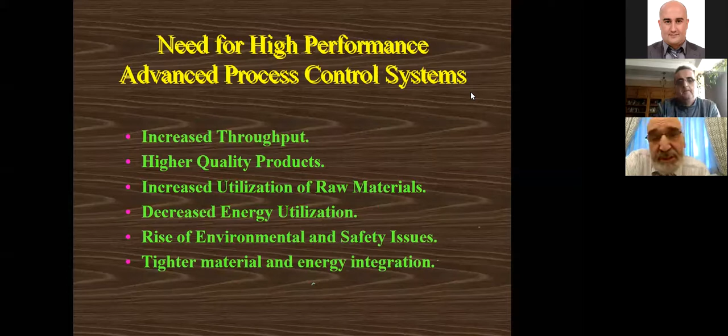Today I will talk about the field of automatic control, its status over these last few decades, and then projections into the future and application areas. I will motivate the importance of automatic control at the beginning, then talk about challenges, and mention what kind of advanced control techniques are partially solving these challenges. Then I will discuss present and future trends of automatic control with various potential applications we will be working on.

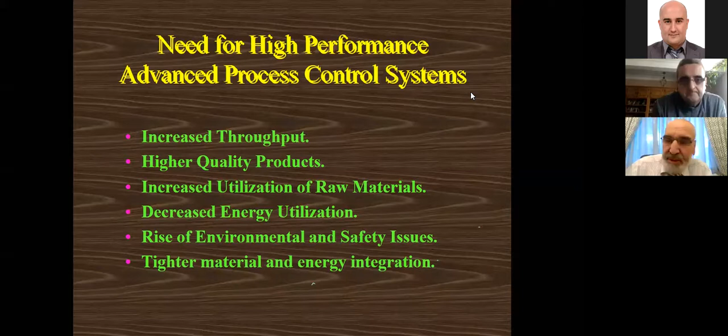Of course, control and process control in particular is very important. Introducing control in a plant or process will increase productivity, give better quality products, optimize utilization of raw material in the loop, save energy, and ensure a safer environment with better energy integration. There are many benefits of control.

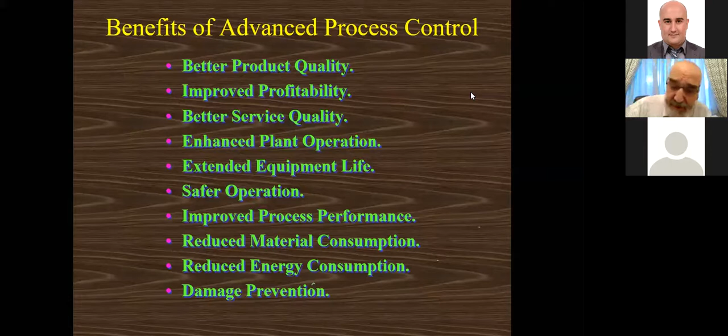Once you introduce a control loop for process variables in any plant, system, or process, with tight control and optimization you get better product quality, better profit because you gain in energy consumption, and better service quality because you maintain variables at nominal values, producing what you want with the quality needed. You enhance plant operation and extend the life of equipment because you develop smooth control so actuators operate smoothly and safely. You improve system output performance, reduce consumption, and prevent accidents.

So what happens when we have a control loop or process control system? What are the challenges? Many, very difficult challenges. We have time delays in systems, and because of the delay you will not be able to reply, control, correct, or compensate for the system before you see the process variable or output. There is some non-minimum phase behavior we don't have time to explain, but anybody is welcome to ask questions later. We have complexity in modeling.

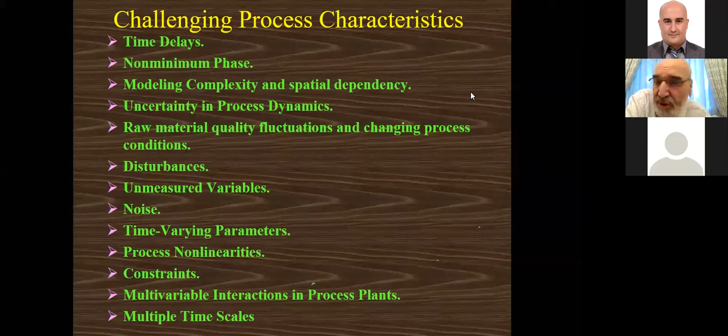We have physical systems whose dynamic behavior depends on space and time. We have uncertainty in process variables, fluctuations in raw material, and all kinds of predictable and unpredictable disturbances. We have variables you cannot measure in some applications such as space, nuclear, chemical, etc. We have hard process nonlinearities that are difficult to develop controllers for. You have constraints on variables, interaction between process loops that make life difficult to control various variables, and you could have multiple timescales, as I will show in a few minutes with some examples.

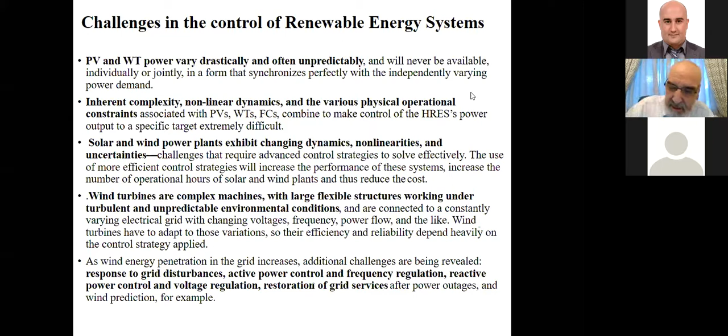An example of these challenges for solar photovoltaic and wind turbines: as you know, you don't get the sun, irradiation, or wind at the time you want, at the pace you want, with the amount you want. Especially for wind, there is a lot of randomness and unpredictability, so the control loop has to deal with that. We have inherent complexities in wind, solar, and fuel cells—nonlinear dynamics, etc. We have changing dynamics; things change with time, sometimes unpredictably, sometimes randomly, sometimes without even knowing the change. For wind systems, these are large structures with big complexity, so the controller has to cope with these complexities.

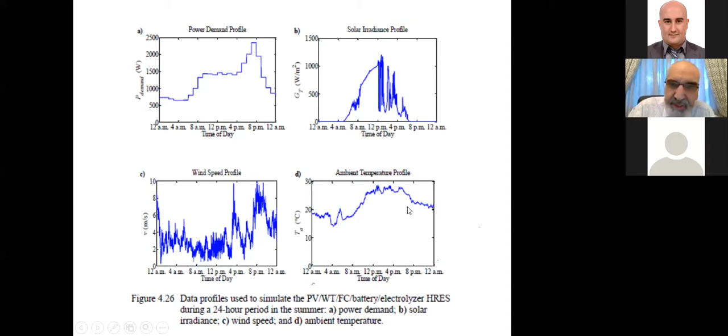Same thing for wind—look at this variability and unpredictability of the wind speed in a given day; the next day it will be something else. And again, all these energy consumptions are affected by the temperature profile, which is also partly unpredictable and very variable.

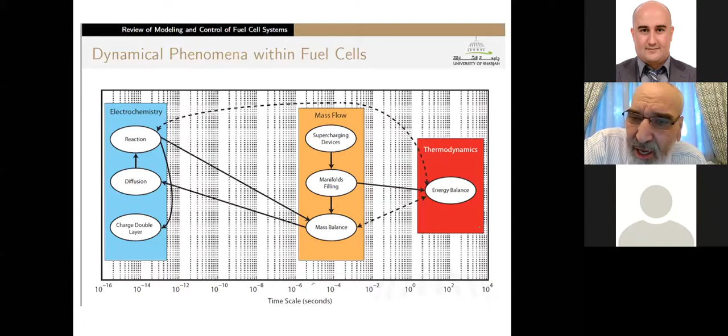Other problems include the multi-time scale behavior I mentioned. You could have systems where your controller has to cope with phenomena changing in seconds, phenomena changing in minutes and hours, or even picoseconds.

Here is an example of a fuel cell. There is electrochemical dynamic behavior, mass flow behavior, and thermodynamics behavior. Thermodynamics are slow, in minutes, sometimes in hours. The physical evolution of thermal behavior can be in seconds and minutes, while the mass flow could be in milliseconds.

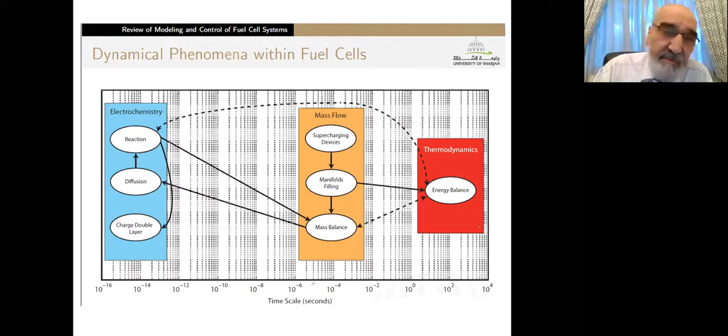Electrochemical dynamic behavior could be in picoseconds and less. So your controller has to be able to follow the behavior of all of these timescales, and it's not evident. Could you imagine controlling a variable that is changing every minute, and another variable that is changing every picosecond? It's not trivial how the controller will do it. Very, very difficult. So these are timescale problems.

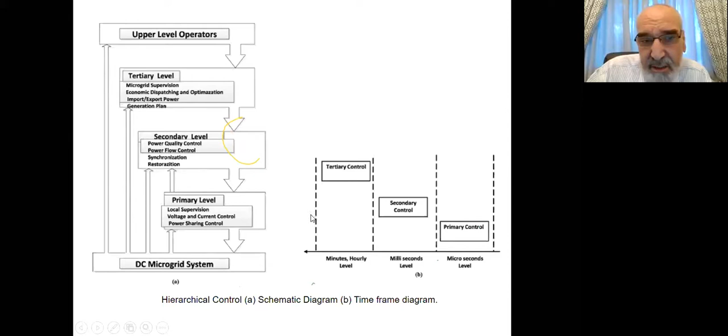Further, you could have multi-level control with some hierarchy: 3 famous hierarchies - primary control, secondary control, and tertiary control. For example, in a microgrid or in many power system applications, you have these 3 levels: the local level, the secondary level, and the management level up there. All of these have to be interconnected and coordinated together, and the controllers at every level are different, with different challenges.

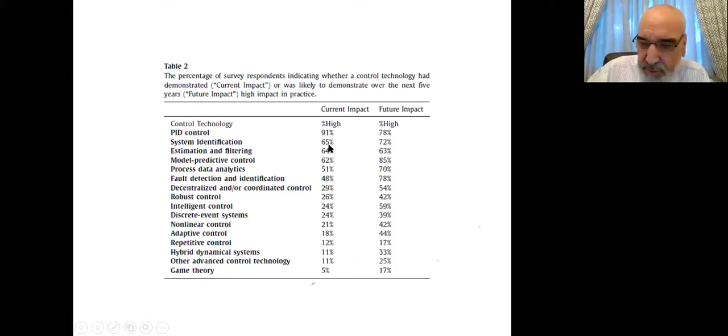And to solve all these problems, many advanced control technologies or techniques have been developed, such as multivariable control, decentralized control, optimal control, model predictive control, robust control, fuzzy logic, neural networks, all of this.

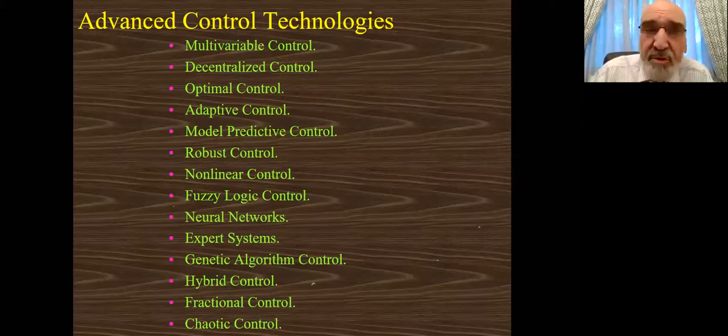So all of this partially solved the problem. For example, multivariable control is good to solve systems that are interacting. Decentralized control is good for multi-loop systems that are weakly connected. Optimal control, you are optimizing something, etc. So every one of these solves part of the problem, but as we say, there is no free lunch theorem - there is no one technique or technology that works for all or does very well for all.

So to give you an example, people are trying to see what is the present and future impact of closed loop control, of automatic control, in the industry. This is a survey done by many famous industries such as Honeywell, Yokogawa, Leeds and Northrup, all major companies in process control. The question was asked: what is the current impact of the famous control technologies, and what will be the impact in the next 5 years or so?

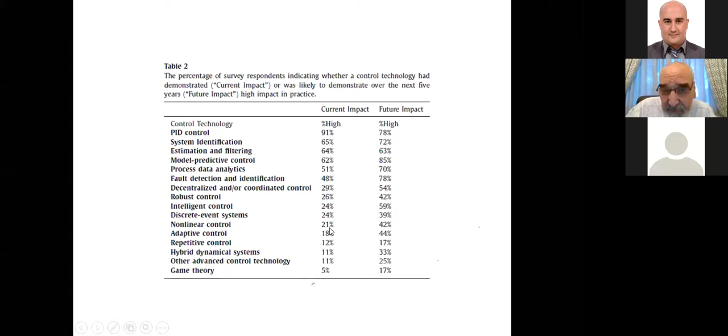Let me give you the conclusion. PID has been dominating for the last 50 years. Proportional integral derivative control, the simple PID, is implemented in every single loop in the industry. But in the future it will be replaced by the famous predictive control. Model predictive control came in the 80s. It's penetrating strongly, trying to slowly replace PID, and in the next 5 years it will replace a lot of it, and continue to replace more. The others - adaptive control, robust control, nonlinear control - even though most of you know all of this, they have been there for a long time, but they are picking up a bit, not enough.

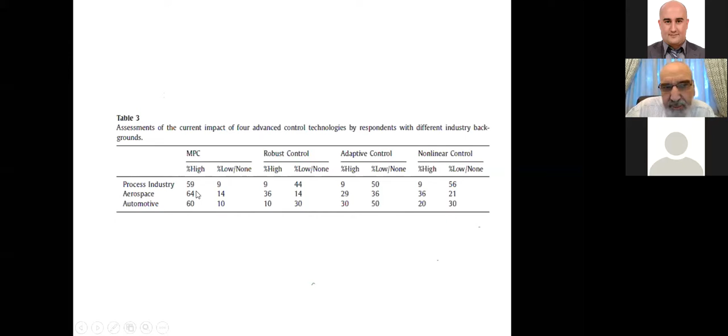More specifically, here is an example of a different survey for 3 industries: the process industry, aerospace, and automotive. And again it confirms the same prediction for the near future. MPC, model predictive control, is going to be dominant now and in the future, compared to robust control which is not picking up, compared to adaptive control which is not picking up enough, and the same for nonlinear control. As you can see, model predictive control is going to be the future.

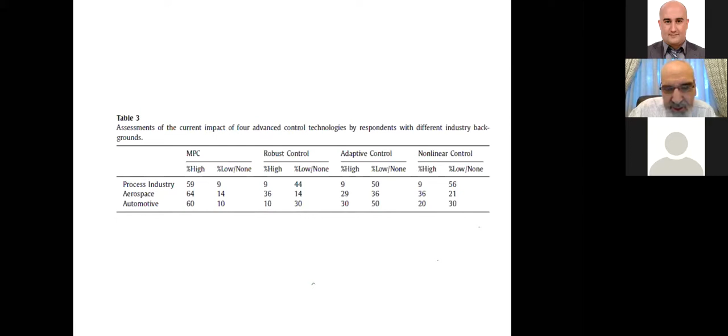If you want to contribute to the industry, work on model predictive control and related issues. There are other theoretical issues of course, but if you can do any improvement in MPC, it has a chance to be implemented in the industry.

And of course, with all those challenges, you may have a physical system whose model is known - this is called a white box model. From the physical, chemical, mathematical laws - KCL, KVL for electrical, Kepler's for aerospace, Schrödinger, Maxwell for antennas and other telecom applications, heat equations for thermal processes - you can write the partial differential equations or differential equations, and that's what we call white box. The model is completely known, and you can develop a model predictive controller on that well-known model.

But there are other physical processes for which you have no idea about the model. The model is unknown; you only have input-output data. This is called a black box. And you need to develop a model predictive control technology that is based on input-output data, not on models.

And again, sometimes you have differential equations of the physical system, but some of the parameters are unknown, and therefore it's called in between black and white—a gray box model. You know the structure of the physical system, the model, but you don't know its parameters.

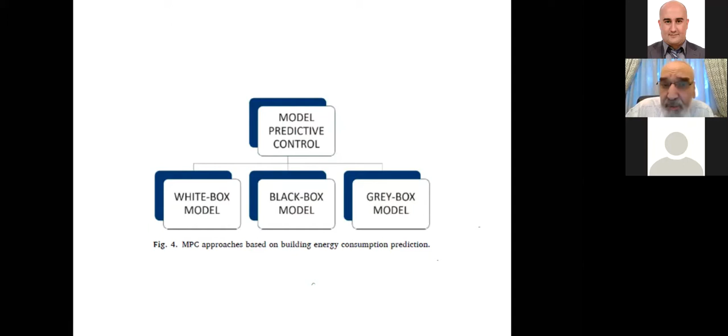So you can see the challenge you have for every technology, let it be model predictive control, adaptive control, or robust control. You need to develop possibly three different types of controllers for the three possible behaviors in physical reality.

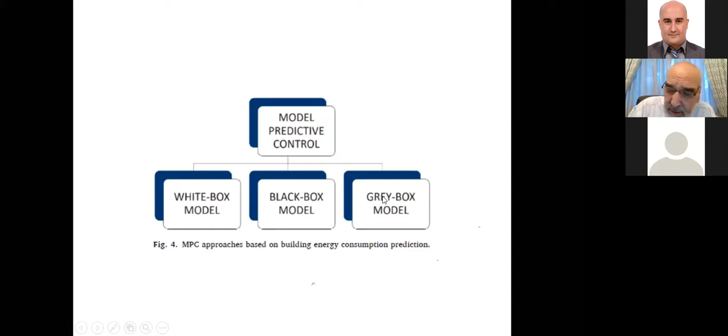And one promising area for black box or gray box control is active disturbance rejection control. You have a process with internal disturbances, uncertainties, parameter variations, and non-parameters—they are all here. And you have unpredictable external disturbances. So what do you do with this famous ADRC, active disturbance rejection control, relatively recent, developed by Chinese Professor Han? You estimate this and this together, called total disturbance.

What is total disturbance? Anything you don't like, anything you don't know, anything unpredictable—time-varying behavior, nonlinearities, constraints, process nonlinearities, internal disturbances, external disturbances, uncertainties. All of them are in here and here. You put them in from the input-output data you can get from your process. You estimate all these uncertainties. Once you estimate them, you can correct and compensate for them through a controller, and control this overall system.

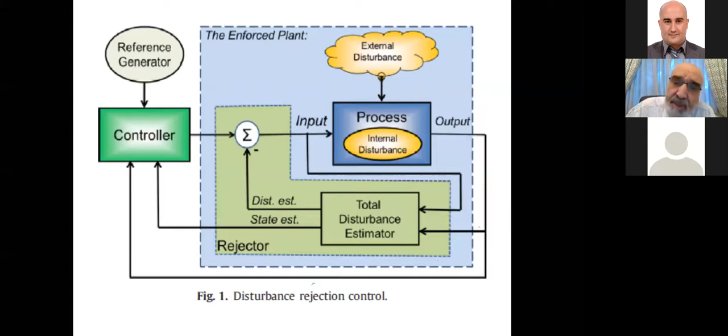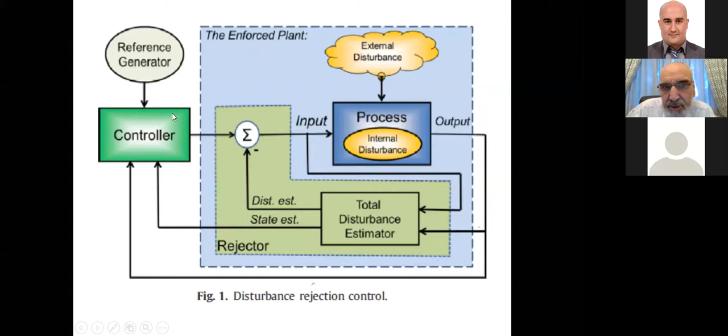And you control a process without knowing the model. I didn't assume anything about whether this model is a certain type of differential equation or so. So this is black box, but people also developed ADRC for gray box models, where you have some partial knowledge of the model of the process, and you can incorporate it into the controller design to develop a closed loop control.

So let me give you, since I said this is state of the art, two findings from two big studies worldwide made by world authorities in control. One was done in 2003, the other in 2017. The 2003 study was done by famous world authorities of control. Professor Murray from Caltech was editing this 100-something pages report, and its summary was published in IEEE Control Systems magazine in 2003-2004.

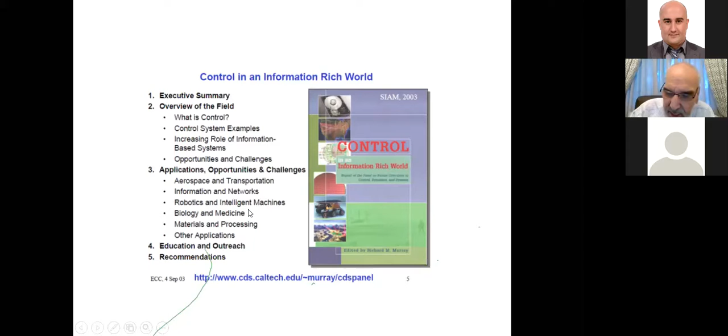And with him, all those famous people—Karl Astrom, John Doyle, Khargonekar, just name it—all the famous people were here to talk about the existing technologies of control and what should be done in the next 10 or 20 years. So they identified important areas of control: aerospace and transportation, information networks, robotics, intelligent machines, biology, etc. And they developed these challenges and opportunities for the next 20 years at that time.

And here is what the opportunities were: emerging control applications, where control theory has room to make things happen—success stories in these areas: aerospace, robotics, networks, materials, economics, biology, smart engines, as you can see, all kinds of applications.

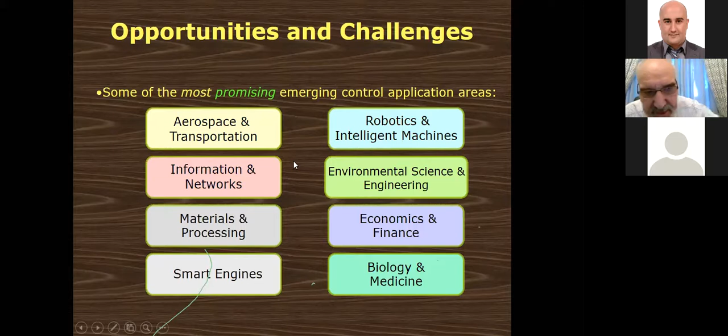Here are examples, all kinds of examples, from robotics to smart structures to sensor networks to traffic, just name it. And here is the summary of future directions they developed out of this 3-year study by 20 world authorities in control. So they gave 5 recommendations.

The first recommendation was to increase research by integrating control, computer science, and communications. And you have seen this over the last 20 years with network control systems, with so many other things that I will mention in detail later.

Increase research in control of high-level decision-making. Yes, control is entering many areas of decision-making in energy, in transportation, in smart cities, etc. Long-range applications, theory, applied mathematics—more and more applied—and in education.

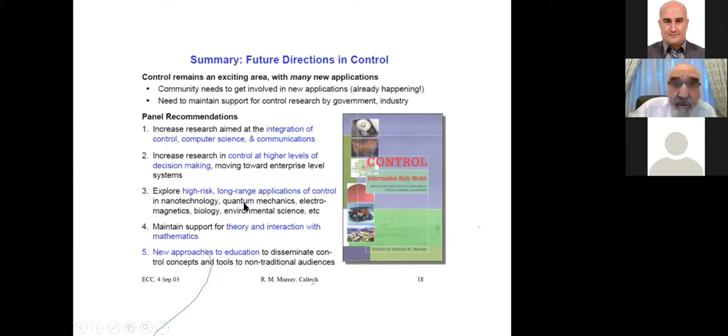So that was the first study. The second study was done 14 years later, with some of the same people such as Murray, Khargonekar, and others that you know. They worked for 2 or 3 years to develop what is the present status of control and what are the next challenges of control so that it will impact humanity. Control theory should contribute and impact humanity.

So it was published in Annual Reviews in Control in 2017 by these same people, who were forming a group in IFAC, the International Federation of Automatic Control. And here is their finding.

Their finding: most countries in the world have what we call Horizon 2030. And in this Horizon 2030, with some variability, most countries have these 5 critical themes, or target areas, or priority areas, or critical societal challenges: transportation, energy, water, healthcare, manufacturing. Okay, some people have 7.

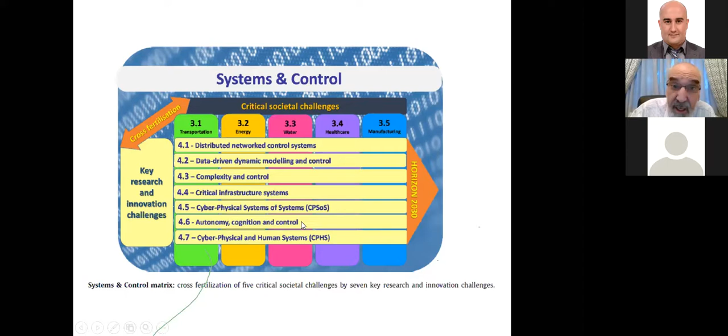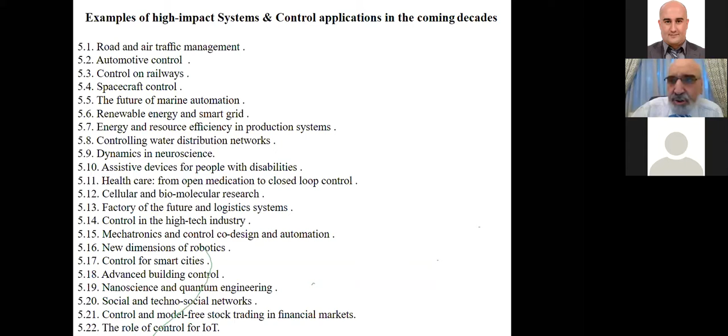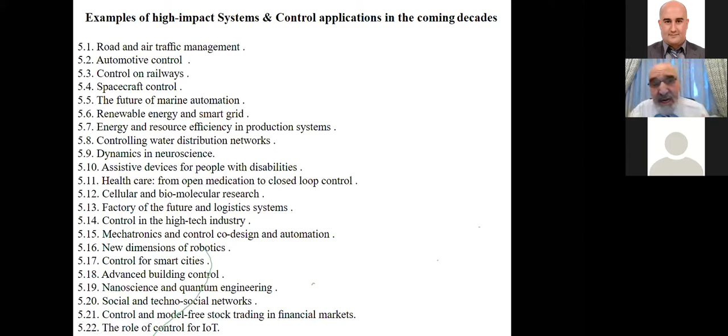And then within this, they identified 22 application areas where control really can do important contributions. I'm sure most of you are working in at least one of these, where control can make the difference and serve humanity: road and air traffic, automotive control, railways, space, marine, renewable energies, smart grids, energy efficiency, distribution networks—all aspects of health, logistics, high-tech technologies, mechatronics, smart cities, buildings, social networks, financial markets, and the role of IoT, Internet of Things, that I will elaborate on a bit later. So these are the areas where control can make important contributions to humanity in the next 10 years.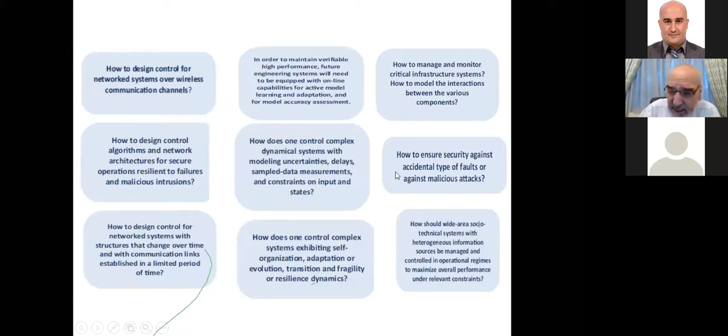And they developed some 20 questions of things we should do. We researchers in control should be replying to or answering over the next 10 years through our research: how to design control for networks over wireless communication, how to design control algorithms, how to ensure security, etc. About 20 questions in all, all important to answer.

People are working in these areas. All right, so let me summarize what was said, plus touch on some specific areas that people have started to work on in research and development, and they will be here for a long time because some of them are barely at the laboratory level, and a lot of work over the next 10, 20 years needs to be done. I will mention the consequences of this for us, control theorists and engineers, and what we should do in this area of control theory and applications.

So again, we continue integrating control, computing, and communication networks. Fault-tolerant and reliable systems are becoming more and more important because physical systems are now complex and you cannot make a simple diagnosis, so you have to develop controllers that are fault-tolerant and reliable. High-level control for decision-making follows the same logic: now you have enterprises operating across countries and continents, and you have to make decisions in optimization and control, so control will play an important role.

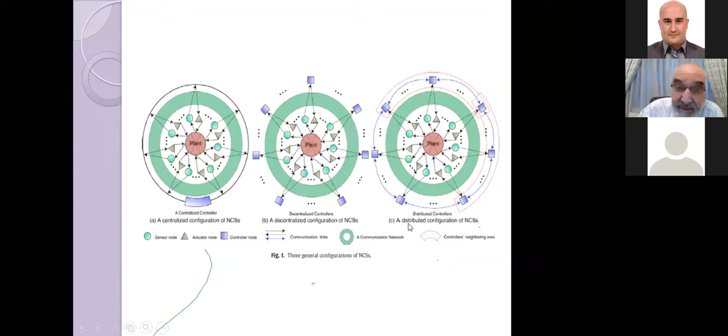Of course, this creates huge, many challenging problems that every one of us has room to do research on. Every one of these items, hundreds of PhD theses will not solve them yet. I supervised myself in some of these areas, MS and PhD theses, but it's only the beginning.

So you have packet dropout. You are sending a signal from a controller to a plant through a network. There may be congestion, and you lose some communication data. You have network security - is your data going to the right place, or is it disturbed and changed? You have sensor failures, actuator failures, quantization, uncertainties, delays in the network, queues, latency. All of these are very challenging problems.

You have to generalize control theory to control theory with delay, with packet dropout, with quantization, with disturbance, with scheduling, with security. So all of these are challenging problems, and hundreds and thousands of theses and research articles have been published in the last 10, 20 years, and still it's in infancy. It's only in the beginning.

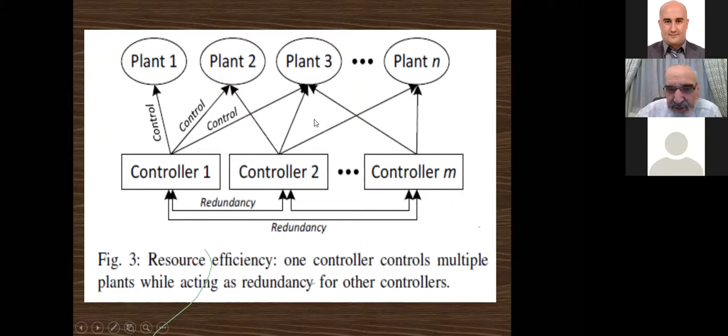More than that, you can do what we call efficiently used controllers. You have many processes. You could have one controller controlling all these processes, different plants, difficult physics plants, even in different continents, and possibly the second controller, if it's not controlling this plant, is redundant to this plant. So controllers at any time can be ready to be used to control and be redundant at other times.

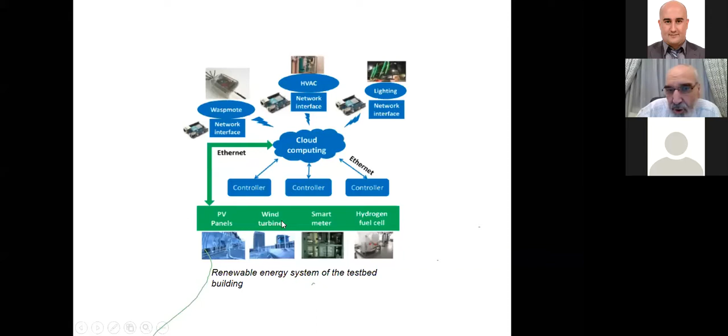Of course, the control of Internet of Things will impose so many challenges. You are controlling over non-deterministic networks. You have latency and jitter. You have high bandwidth. With the Internet of Things, it's not only sensors and actuators, they are audios, videos, images that you are going to send to different places, and therefore you need high bandwidth. There is a big challenge with sending videos in seconds or milliseconds. And the security aspect, you are dealing with data, so you need to make sure you are solving the security aspect.

So all of these are affecting your control loops, and therefore you need to generalize classical control theory with a control theory where in the loop you have a stochastic network that is sending and receiving data, there is a queue and delay in your sensing. You need extremely high fast speed to process in real time your images and videos, and you need to be secure and safe. So all of these are big challenges for control theorists.

And because of this, the conclusion of this talk is going to be as follows: it's not anymore control theory alone, it's really a multidisciplinary area. It's control theory with computer science, with mathematics together, that solve all these problems. Control theory, communication theory, programming, all of this together to solve all these problems.

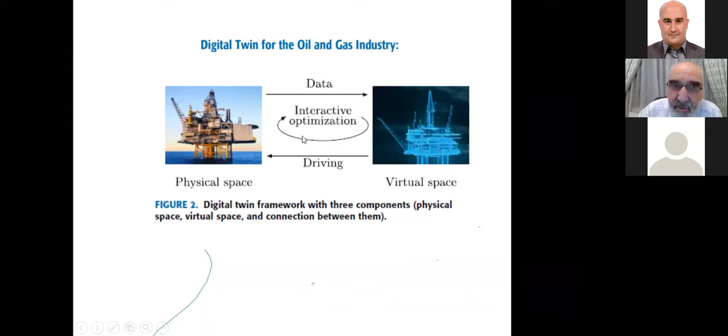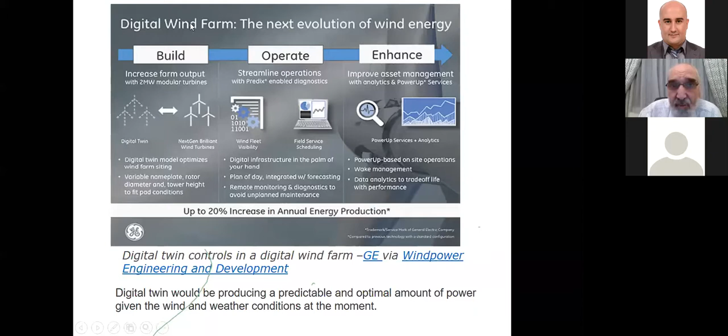So this is just a detail, and this is just to tell you that digital twins are already implemented. This is an implementation in some wind farm. I don't want to go through this detail, but digital twins is coming very strong. It has many advantages, and this is what many important famous companies in the world are saying.

It is predicted by 2022, just in a year and a half or a year, over two-thirds of the companies implementing IoT will have deployed a digital twin solution into the production of oil, gas, solar, transportation, just name it. So it's next in the corner. So it's good for us that some of us start doing research in this area, meaning control within the Internet of Things, cloud control and network control systems, etc.

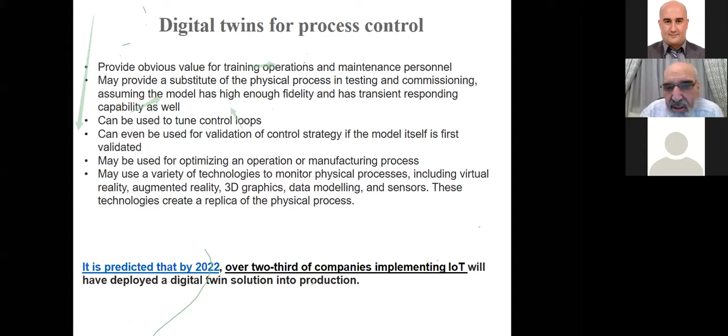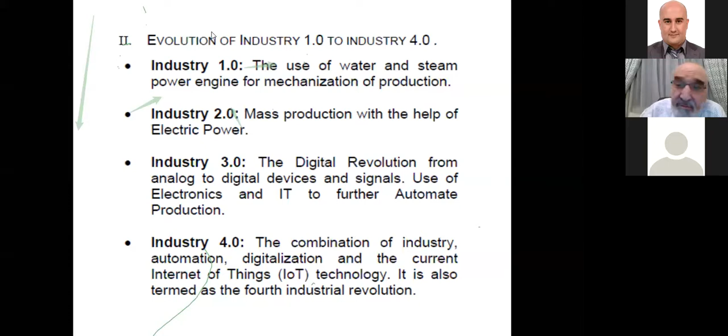And the last thing I want to mention is all of this is done in the context of the fourth industrial revolution, which is Industry 4, which we are living today, which is the combination of industry, automation, digitalization, and current Internet of Things all together to connect the whole world and do whatever is needed. With this, a plant in Brazil is controlled from Finland or from anywhere in the world. Of course, Industry 4 has all of these areas we mentioned, that I mentioned many of them: Internet of Things, cloud, integration, decentralization, robots, all of these applications.

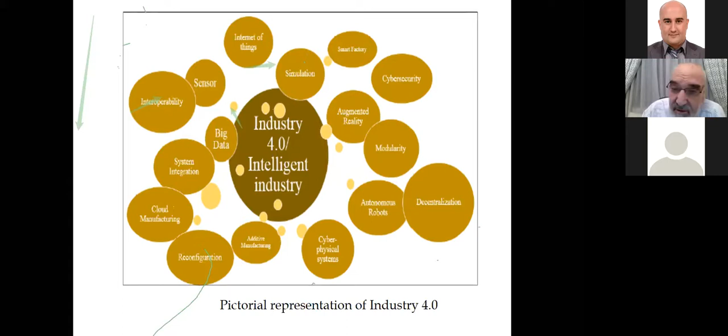And every one of these needs a lot of control and signal processing research to develop in this area of Industry 4, or fourth industrial revolution, that just came, and we are living for it, that will stay for a long time. As you know, every industrial revolution stays for a long time. Some of them stay the century or the 60 years. So this will be with us for the next many years, or a few decades.

Okay, these are applications. I think I will have to stop here because we are running out of time, and I'll be very happy to answer any questions you have. Thank you for listening.